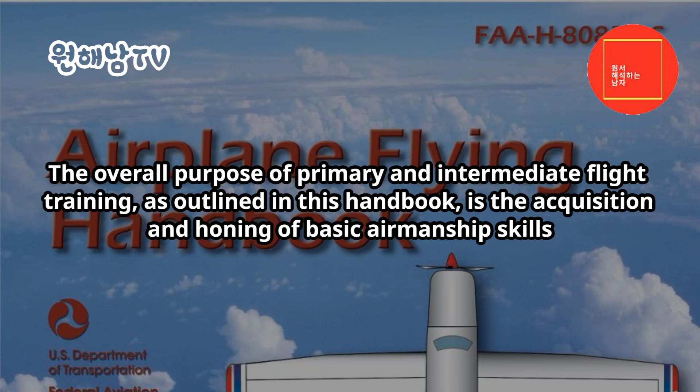Introduction. The overall purpose of primary and intermediate flight training, as outlined in this handbook, is the acquisition and honing of basic airmanship skills. Airmanship is a broad term that includes a sound knowledge of and experience with the principles of flight, the knowledge, experience, and ability to operate an aircraft with competence and precision, both on the ground and in the air, and the application of sound judgment that results in optimal operational safety and efficiency.

Learning to fly an aircraft has often been compared to learning to drive an automobile. This analogy is misleading, since aircraft operate in a three-dimensional environment and require a depth of knowledge and type of motor skill development that is more sensitive to this situation, such as coordination: the ability to use the hands and feet together subconsciously, and in the proper relationship, to produce desired results in the airplane.

Timing: the application of muscular coordination at the proper instant to make flight and all maneuvers a constant, smooth process. Control touch: the ability to sense the action of the airplane and knowledge to determine its probable actions immediately regarding attitude and speed variations, by sensing the varying pressures and resistance of the control surfaces transmitted through the flight controls.

Speed sense: the ability to sense and react to reasonable variations of airspeed. An accomplished pilot demonstrates the knowledge and ability to assess a situation quickly and accurately, and determine the correct procedure to be followed under the existing circumstance.

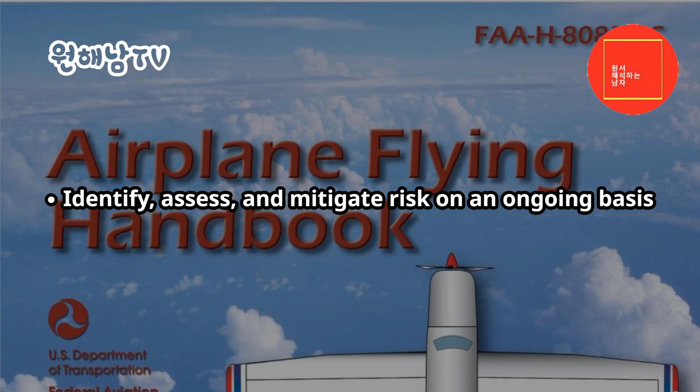The development of airmanship skills depends upon effort and dedication on the part of both the learner and the flight instructor, beginning with the very first training flight, where proper habit formation begins with the learner being introduced to good operating practices. Every airplane has its own particular flight characteristics.

The purpose of primary and intermediate flight training, however, is not to learn how to fly a particular make and model airplane. The purpose of flight training is to develop the knowledge, experience, skills, and safe habits that establish a foundation and are transferable to any airplane.

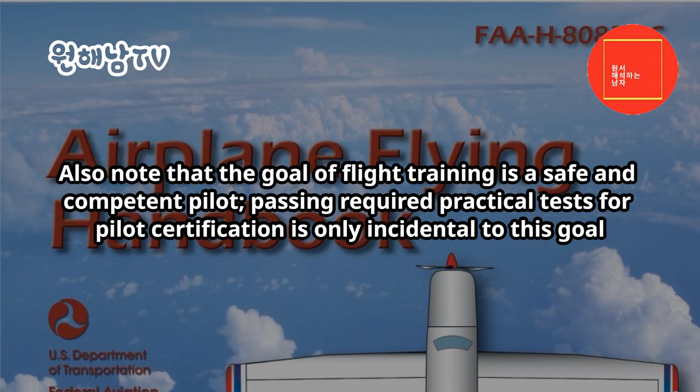The pilot who has acquired necessary skills during training, and develops these skills by flying training-type airplanes with precision and safe flying habits, is able to easily transition to more complex and higher performance airplanes. Also note that the goal of flight training is a safe and competent pilot. Passing required practical tests for pilot certification is only incidental to this goal.

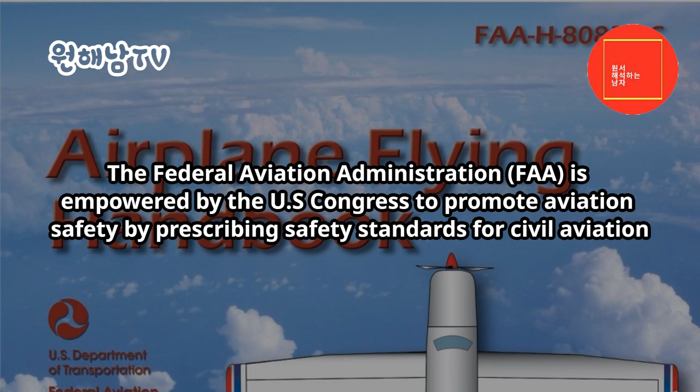Role of the FAA. The Federal Aviation Administration is empowered by the U.S. Congress to promote aviation safety by prescribing safety standards for civil aviation. Standards are established for the certification of airmen and aircraft, as well as outlining operating rules.

This is accomplished through the Code of Federal Regulations, CFR, formerly referred to as Federal Aviation Regulations, FAR. Title 14 of the CFR, 14 CFR, is titled Aeronautics and Space, with Chapter 1 dedicated to the FAA. Subchapters are broken down by category with numbered parts detailing specific information. For ease of reference, and since the parts are numerical, the abbreviated pattern 14 CFR Part blank is used, for example, 14 CFR Part 91.

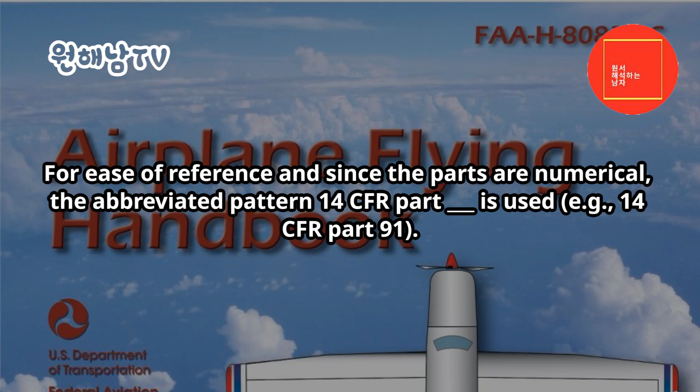This guidance is not legally binding in its own right, and will not be relied upon by the FAA as a separate basis for affirmative enforcement action or other administrative penalty. Conformity with the guidance is voluntary only, and nonconformity will not affect rights and obligations under existing statutes and regulations.

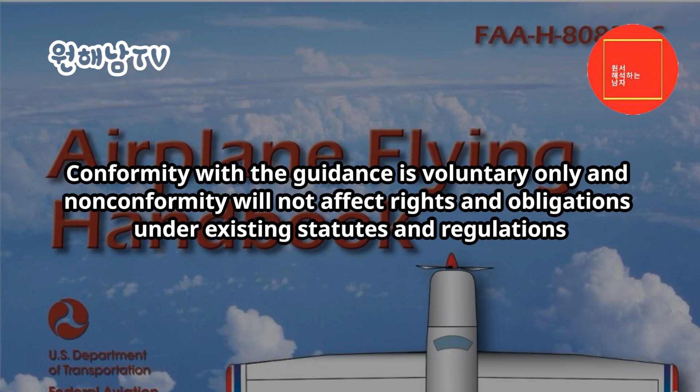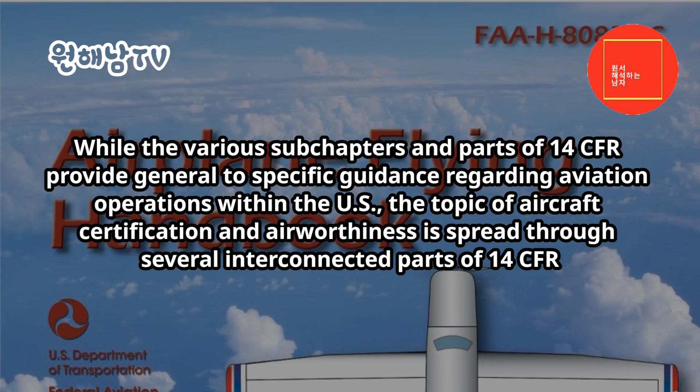While the various subchapters and parts of 14 CFR provide general to specific guidance regarding aviation operations within the U.S., the topic of aircraft certification and airworthiness is spread through several interconnected parts of 14 CFR. 14 CFR Part 21 prescribes procedural requirements for issuing airworthiness certificates and airworthiness approvals for aircraft and aircraft parts.

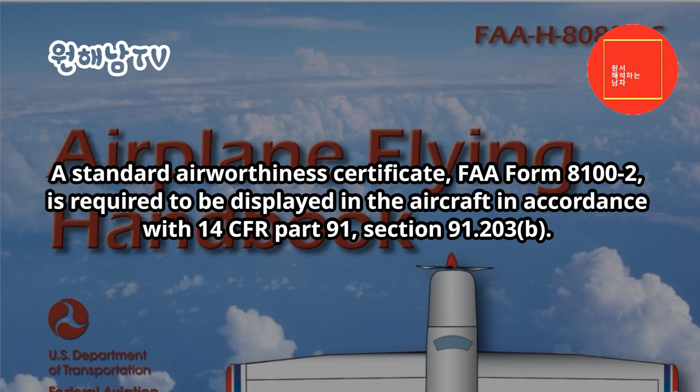A standard airworthiness certificate, FAA Form 8100-2, is required to be displayed in the aircraft in accordance with 14 CFR Part 91, Section 91.203(b). It is issued for aircraft type certificated in the normal, utility, acrobatic, commuter, or transport category, and for manned free balloons. A standard airworthiness certificate remains valid as long as the aircraft meets its approved type.

Design is in a condition for safe operation, and maintenance, preventative maintenance and alterations are performed in accordance with 14 CFR Parts 21, 43, and 91. 14 CFR Part 39 is the authority for the FAA to issue airworthiness directives, ADs, when an unsafe condition exists in a product, aircraft, or part, and the condition is likely to exist or develop in other products of the same type design.

14 CFR Part 43 prescribes rules governing the maintenance, preventive maintenance, rebuilding, and alteration of any aircraft having a U.S. airworthiness certificate. It also applies to the airframe, aircraft engines, propellers, appliances, and component parts of such aircraft.

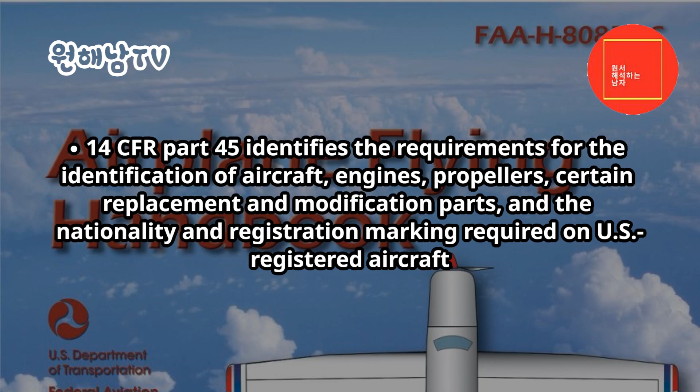14 CFR Part 45 identifies the requirements for the identification of aircraft, engines, propellers, certain replacement and modification parts, and the nationality and registration marking required on U.S. registered aircraft. 14 CFR Part 91 outlines aircraft certifications and equipment requirements for the operation of aircraft in U.S. airspace.

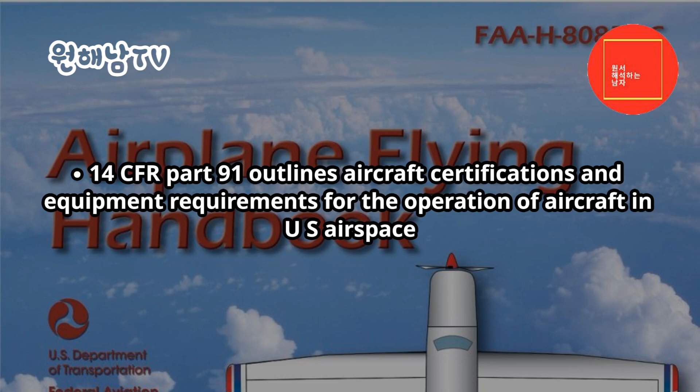It also prescribes rules governing maintenance, preventive maintenance, and alterations. Also found in 14 CFR Part 91 is the requirement to maintain records of maintenance, preventive maintenance, and alterations, as well as records of the 100-hour, annual, progressive, and other required or approved inspections.

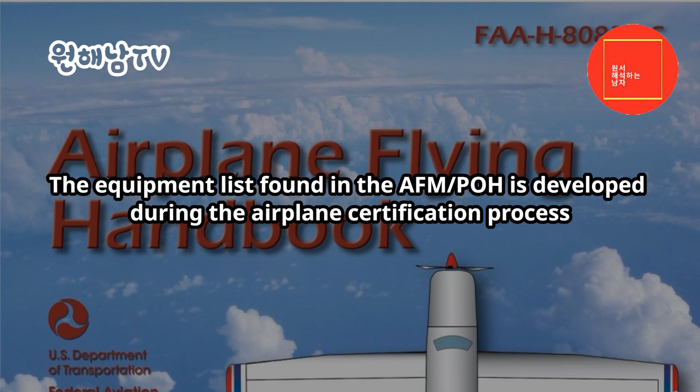While 14 CFR Part 91, Section 91.205 outlines the minimum equipment required for flight, the Airplane Flight Manual Pilot's Operating Handbook, AFMPOH, lists the equipment required for the airplane to be airworthy. The equipment list found in the AFMPOH is developed during the airplane certification process.

The equipment list, originally issued by the manufacturer, is maintained by the Type Certificate Data Sheet (TCDS). An aircraft and its installed components and parts must conform to the original type certificate or approved altered conditions to meet the definition of airworthy in accordance with 14 CFR Part 3.5.

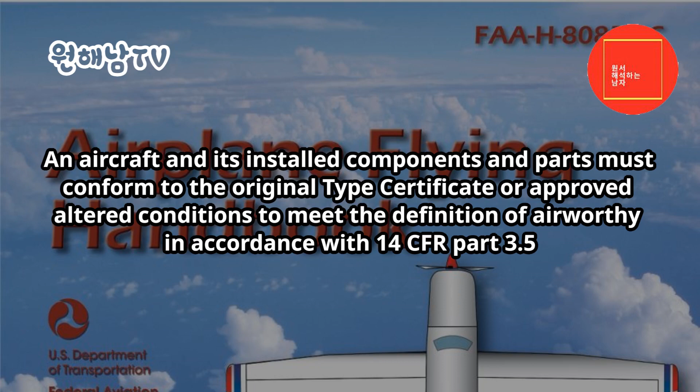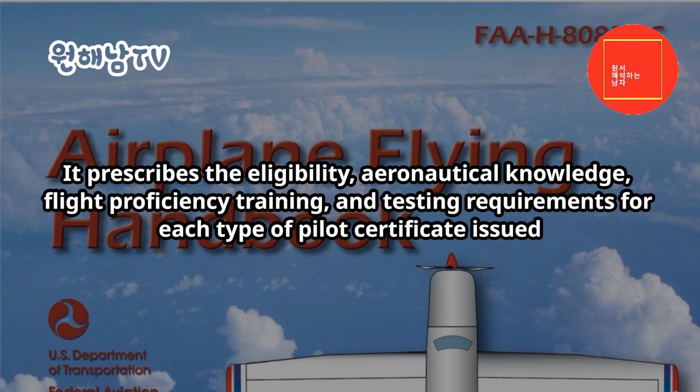Certification requirements for pilots, medical certificate requirements, and operating rules are found in the following parts. 14 CFR Part 61 pertains to the certification of pilots, flight instructors, and ground instructors. It prescribes the eligibility, aeronautical knowledge, flight proficiency training, and testing requirements for each type of pilot certificate issued.

14 CFR Part 67 prescribes the medical standards and certification procedures for issuing medical certificates for airmen, and for remaining eligible for a medical certificate. 14 CFR Part 68 contains requirements for operating certain small aircraft without a medical certificate.

14 CFR Part 91 contains general operating and flight rules. The section is broad in scope and provides general guidance in the areas of general flight rules, visual flight rules (VFR), instrument flight rules (IFR), and as previously discussed, aircraft maintenance, preventive maintenance, and alterations.

Flight Standards Service. The FAA's Flight Standards Service, FS, sets aviation standards for airmen and aircraft operations in the United States, and for American airmen and aircraft around the world.

Flight Standards is organized into 4 functional offices: Office of Safety Standards, Air Carrier Safety Assurance, General Aviation Safety Assurance, and Foundational Business. The primary interface between FS and the general aviation community is the Local Flight Standards District Office, FSDO. The FSDOs are responsible for the certification and surveillance of certain air carriers, air operators, flight schools, training centers, airmen, pilots, flight instructors, mechanics, and other certificate holders.

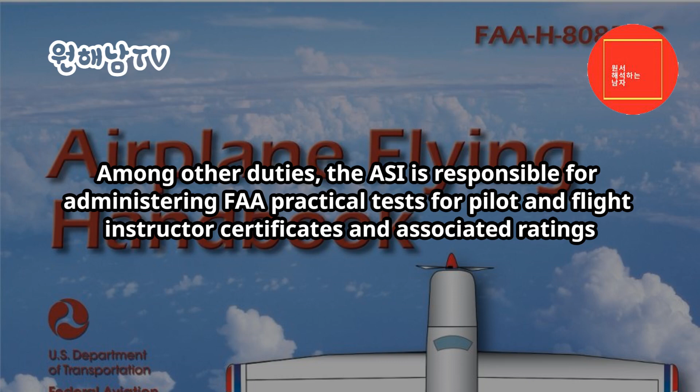Thereafter, the inspector will complete recurrent training on a regular basis. Among other duties, the ASI is responsible for administering FAA practical tests for pilot and flight instructor certificates and associated ratings. Questions concerning pilot certification and/or requests for other aviation information or services should be directed to the FSDO.

For specific FSDO locations and telephone numbers, refer to www.faa.gov. Role of the pilot examiner.

Pilot and flight instructor certificates are issued by the FAA upon satisfactory completion of required knowledge and practical tests. The administration of practical tests is an FAA responsibility that may occur at the FSDO level.

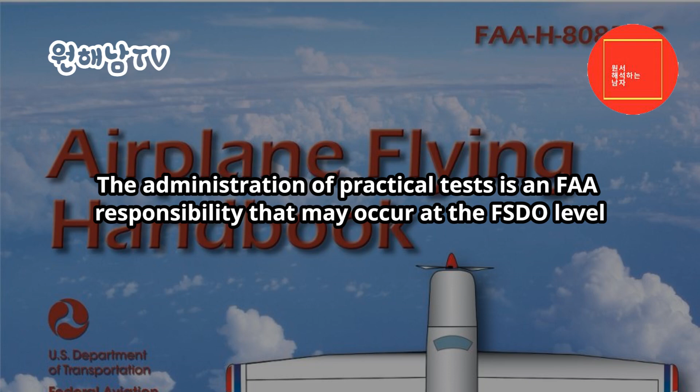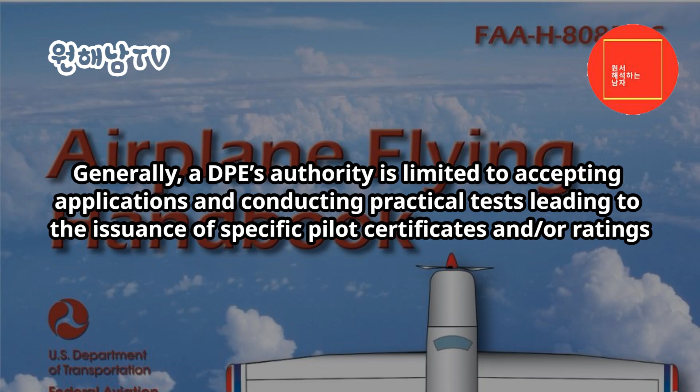However, in order to satisfy the public need for pilot testing and certification services, the FAA delegates certain responsibilities, as the need arises, to private individuals who are not FAA employees. A designated pilot examiner, DPE, is a private citizen who is designated as a representative of the FAA administrator to perform specific, but limited, pilot certification tasks on behalf of the FAA, and may charge a reasonable fee for doing so. Generally, a DPE's authority is limited to accepting applications and conducting practical tests, leading to the issuance of specific pilot certificates and/or ratings. A DPE operates under the direct supervision of the FSDO that holds the examiner's designation file.

A FSDO inspector is assigned to monitor the DPE's certification activities. The FAA selects highly qualified individuals to be DPEs. These individuals have good industry reputations for professionalism, high integrity, a demonstrated willingness to serve the public, and adherence to FAA policies and procedures in certification matters. A DPE is expected to administer practical tests with the same degree of professionalism, using the same methods, procedures, and standards as an FAA ASI.

Note that a DPE is not an FAA ASI. A DPE cannot initiate enforcement action, investigate accidents, or perform surveillance activities on behalf of the FAA. However, the majority of FAA practical tests at the recreational, private, and commercial pilot level are administered by DPEs.

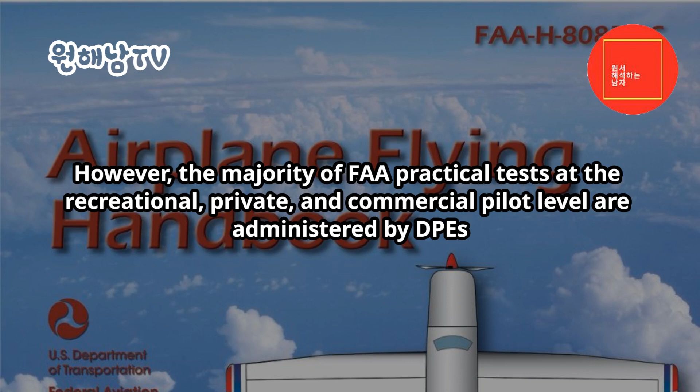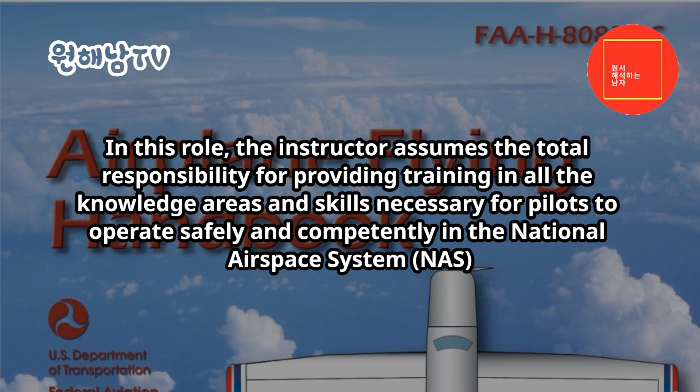Role of the flight instructor. The flight instructor is the cornerstone of aviation safety. The FAA has adopted an operational training concept that places the full responsibility for pilot training on the flight instructor. In this role, the instructor assumes the total responsibility for providing training in all the knowledge areas and skills necessary for pilots to operate safely and competently in the National Airspace System, NAS. This training includes airmanship skills, pilot judgment and decision-making, hazard identification, risk analysis, and good operating practices.

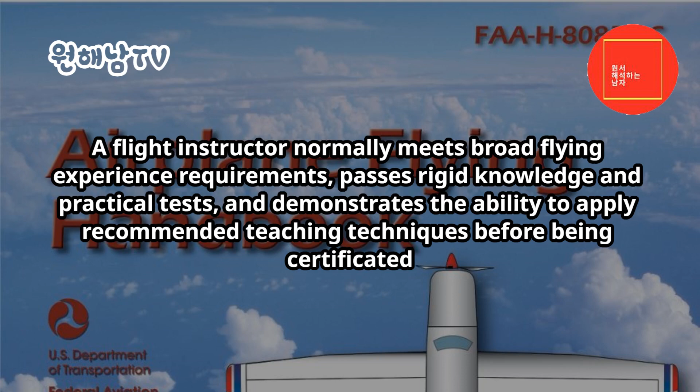A flight instructor normally meets broad flying experience requirements, passes rigid knowledge and practical tests, and demonstrates the ability to apply recommended teaching techniques before being certificated. A pilot training program is dependent on the quality of the ground and flight instruction given. A good flight instructor has a thorough understanding of the learning process, knowledge of the fundamentals of instruction, and the ability to communicate effectively with the learner.

A good flight instructor uses a syllabus and insists on correct techniques and procedures from the beginning of training, so that the learner will develop proper habit patterns. The syllabus should embody the building block method of instruction, in which the learner systematically progresses from the known to the unknown. The course of instruction should be laid out so that each new maneuver embodies the principles involved in the performance of those previously undertaken.

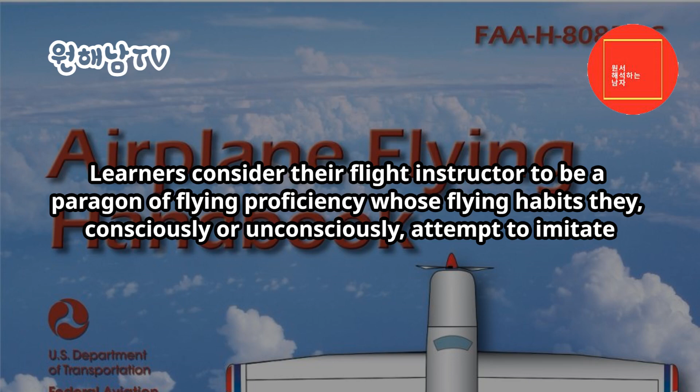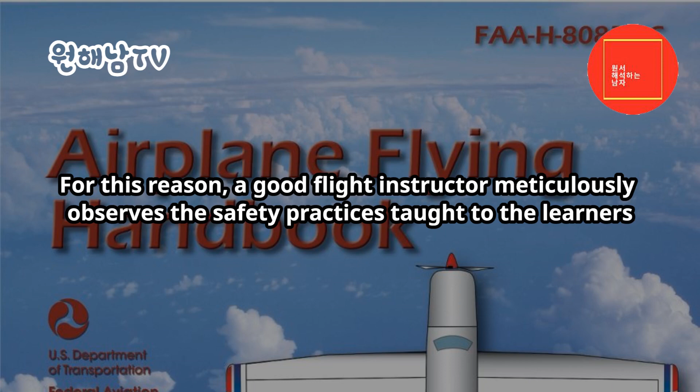Consequently, through each new subject introduced, the learner not only learns a new principle or technique, but also broadens their application of those previously learned, and has their deficiencies in the previous maneuvers emphasized and made obvious. The flying habits of the flight instructor, both during flight instruction and as observed by learners when conducting other pilot operations, have a vital effect on safety. Learners consider their flight instructor to be a paragon of flying proficiency, whose flying habits they, consciously or unconsciously, attempt to imitate. For this reason, a good flight instructor meticulously observes the safety practices taught to the learners, and carefully observes all regulations and recognized safety practices during all flight operations.

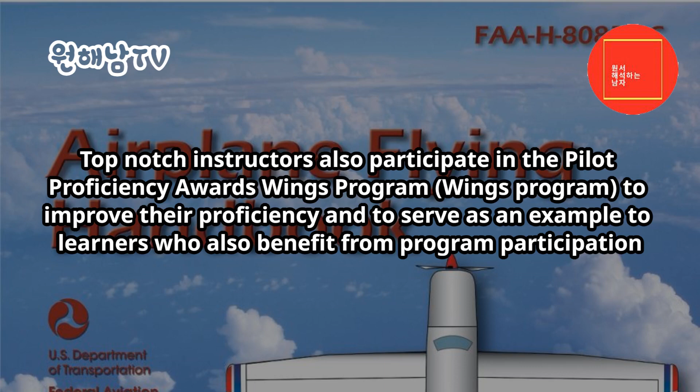A prospective pilot should know that there are other differences among flight instructors. Certain instructors who have performed at a high level have earned a Gold Seal Flight Instructor Certificate. This is not a requirement when looking for an instructor, but it is an indication of an active and successful instructor. Top-notch instructors also participate in the Pilot Proficiency Awards Wings program, to improve their proficiency, and to serve as an example to learners who also benefit from program participation.

Generally, an individual who enrolls in a pilot training program is prepared to commit considerable time, effort, and expense in pursuit of a pilot certificate. A trainee may judge the effectiveness of the flight instructor and the overall success of the pilot training program solely in terms of being able to pass the requisite FAA practical test.

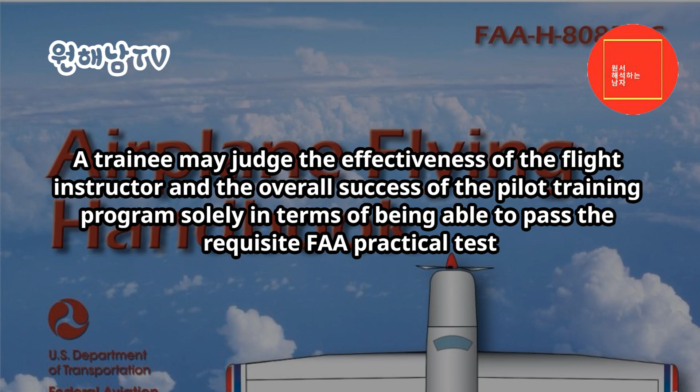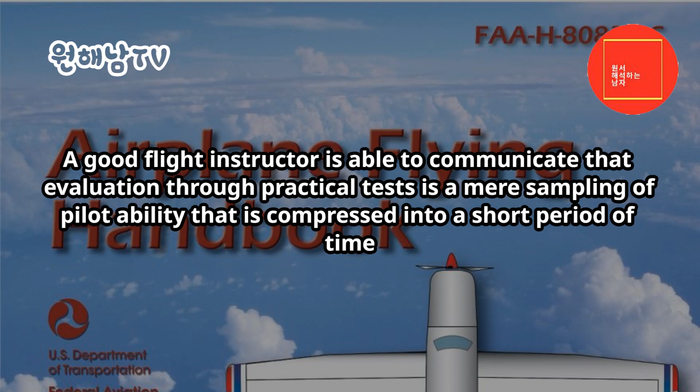A good flight instructor is able to communicate that evaluation through practical tests is a mere sampling of pilot ability that is compressed into a short period of time. The flight instructor's role is to train the total pilot.

Sources of flight training. The major sources of flight training in the United States include FAA-approved pilot schools and training centers, non-certificated 14 CFR Part 61 flying schools, and independent flight instructors.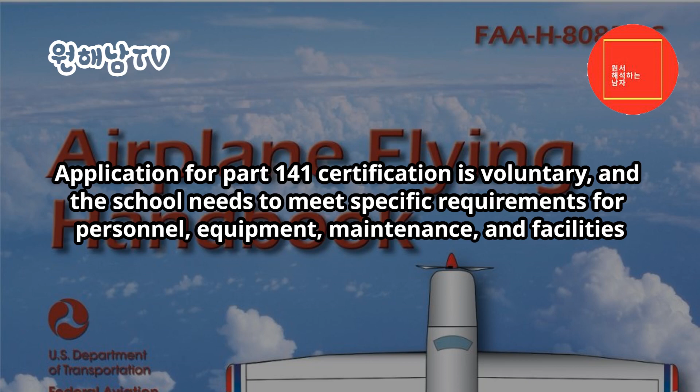FAA-approved schools are those flight schools certificated by the FAA as pilot schools under 14 CFR Part 141. Application for Part 141 certification is voluntary, and the school needs to meet specific requirements for personnel, equipment, maintenance, and facilities. The school operates each course offering in accordance with an established curriculum that includes a training course outline, TCO, approved by the FAA. Each TCO contains enrollment prerequisites, a detailed description of each lesson including standards and objectives, expected accomplishments and standards for each stage of training.

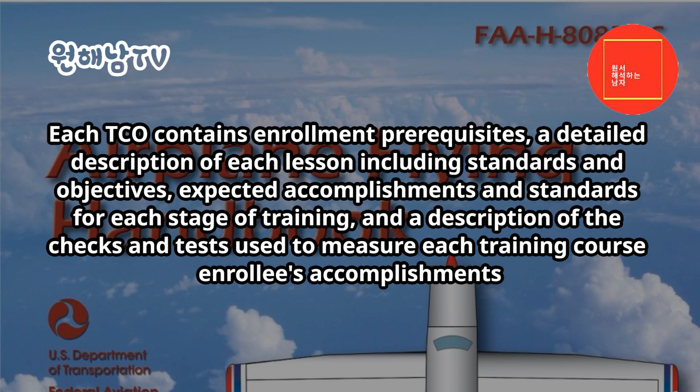A description of the checks and tests used to measure each training course enrollee's accomplishments. An FAA-approved pilot school air agency certificate expires and needs to be renewed every 2 years. Renewal is contingent upon proof of continued high-quality instruction and a minimum level of instructional activity. Training at an FAA-certificated pilot school is structured, and because of this structured environment, the graduates of these pilot schools are allowed to meet the certification experience requirements of 14 CFR Part 61 with less flight time.

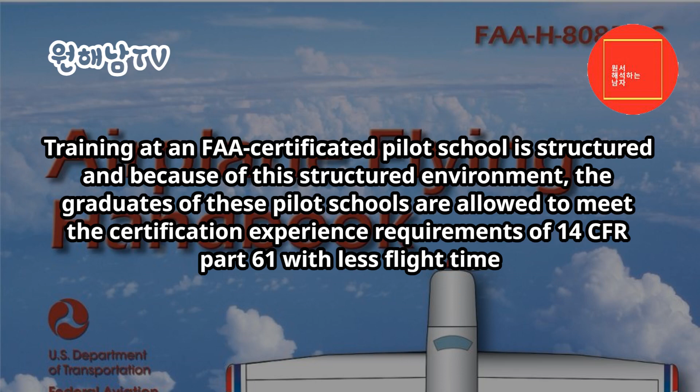Many FAA-certificated pilot schools have DPEs on staff to administer FAA practical tests. Some schools have been granted examining authority by the FAA. A school with examining authority for a particular course has the authority to recommend its graduates for pilot certificates or ratings without further testing by the FAA. A list of FAA-certificated pilot schools and their training courses can be found at av-info.faa.gov/PilotSchool.asp.

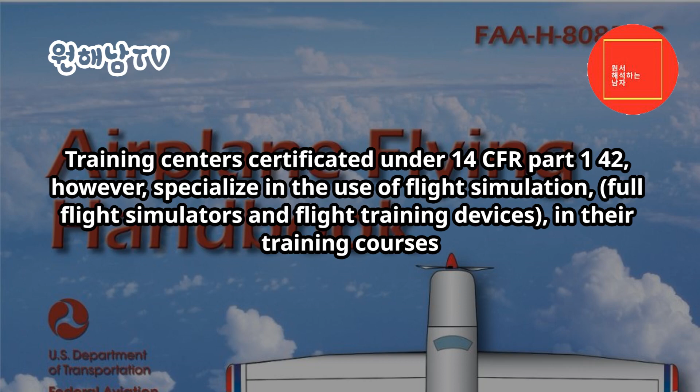FAA-approved training centers are certificated under 14 CFR Part 142. Training centers, like certificated pilot schools, operate in a structured environment with approved courses and curricula and stringent standards for personnel, equipment, facilities, operating procedures, and record-keeping. Training centers certificated under 14 CFR Part 142, however, specialize in the use of flight simulation, full flight simulators and flight training devices, in their training courses.

There are a number of flying schools in the United States that are not certificated by the FAA. These schools operate under the provisions of 14 CFR Part 61. Many of these non-certificated flying schools offer excellent training and meet or exceed the standards required of FAA-approved pilot schools. Flight instructors employed by non-certificated flying schools, as well as independent flight instructors, meet the same basic 14 CFR Part 61 flight instructor requirements for certification and renewal as those flight instructors employed by FAA-certificated pilot schools.

In the end, any training program is dependent upon the quality of the ground and flight instruction a learner receives.

Airman Certification Standards, ACS, and Practical Test Standards, PTS. Practical tests for FAA pilot certificates and associated ratings are administered by FAA inspectors and DPEs using FAA Airman Certification Standards, ACS, and Practical Test Standards, PTS, which contain structured areas of operation, tasks, and standards. 14 CFR Part 61, Section 61.43 specifies that the practical test consists of the tasks specified in the areas of operation for the airman certificate or rating sought.

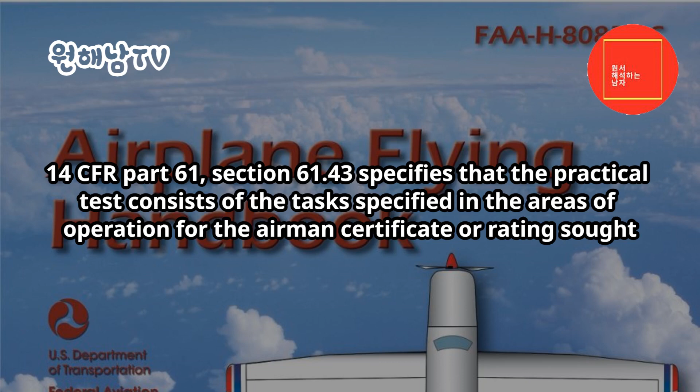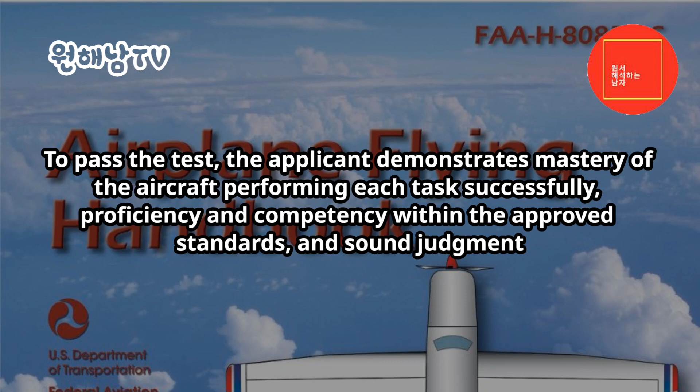To pass the test, the applicant demonstrates mastery of the aircraft, performing each task successfully, proficiency and competency within the approved standards, and sound judgment.

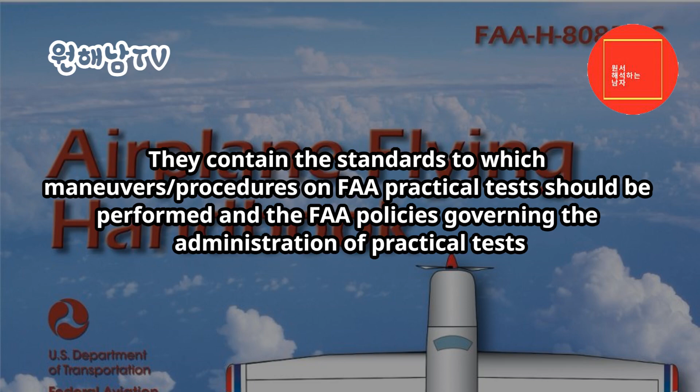It should be emphasized that the ACS and PTS are testing documents rather than teaching documents, although the pilot applicant should be familiar with these books and refer to the standards they contain during training. The ACS and PTS are not intended to be used as a training syllabus. They contain the standards to which maneuvers and procedures on FAA practical tests should be performed, and the FAA policies governing the administration of practical tests.

An appropriately rated flight instructor is responsible for training a pilot applicant to acceptable standards in all subject matter areas, procedures, and maneuvers included in, and encompassed by, the tasks within each area of operation in the appropriate ACS and PTS. Flight instructors and pilot applicants should always remember that safe, competent piloting requires a commitment to learning, planning, and risk management that goes beyond rote performance of maneuvers.

Descriptions of tasks and information on how to perform maneuvers and procedures are contained in reference and teaching documents, such as this handbook. A list of reference documents is contained in the appendices of each ACS and PTS.

It is necessary that the latest version of the PTS and ACS, with all recent changes, be referenced for training. All recent versions and changes to the FAA ACS and PTS may be viewed or downloaded at

www.faa.gov. Safety considerations: in the interest of safety and good habit pattern formation, there are certain basic flight safety practices and procedures that should be emphasized by the flight instructor and adhered to by both instructor and learner, beginning with the very first dual instruction flight.

These include, but are not limited to, collision avoidance procedures, including proper scanning techniques and clearing procedures, runway incursion avoidance, stall awareness, positive transfer of controls, and flight deck workload management.

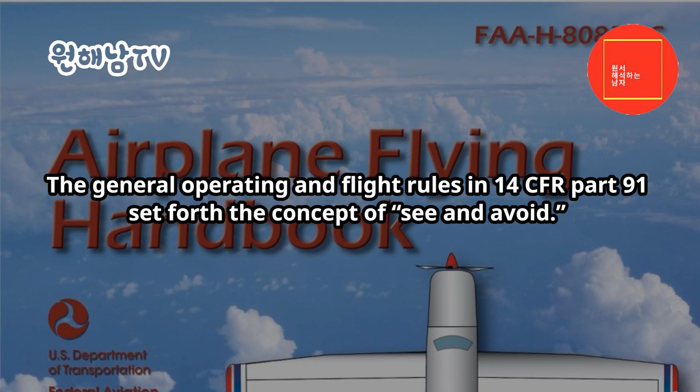Collision avoidance: all pilots should be alert to the potential for mid-air collision and impending loss of separation. The general operating and flight rules in 14 CFR Part 91 set forth the concept of see and avoid. This concept requires that vigilance shall be maintained at all times by each person operating an aircraft, regardless of whether the operation is conducted under IFR or VFR.

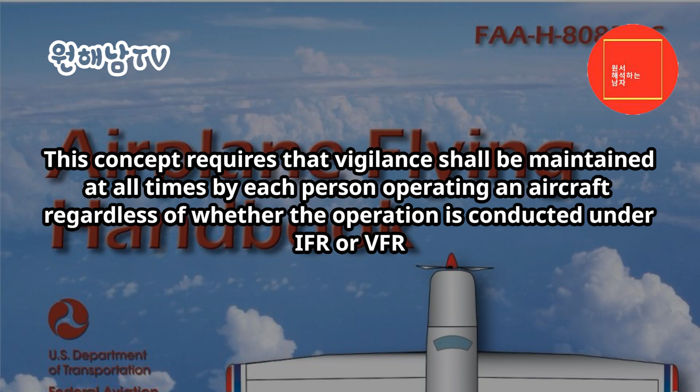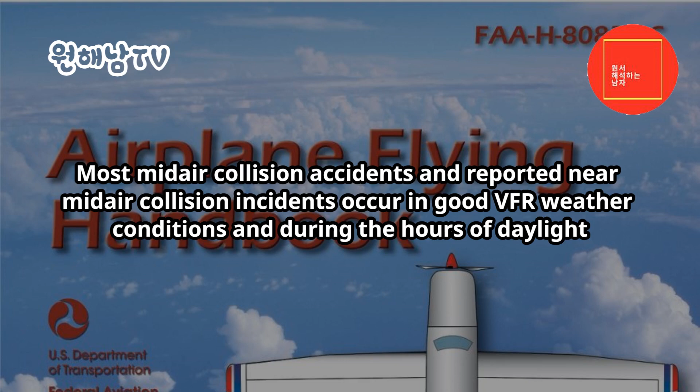Pilots should also keep in mind their responsibility for continuously maintaining a vigilant lookout, regardless of the type of aircraft being flown and the purpose of the flight. Most mid-air collision accidents and reported near mid-air collision incidents occur in good VFR weather conditions and during the hours of daylight. Most of these accidents and incidents occur within 5 miles of an airport and/or near navigation aids.

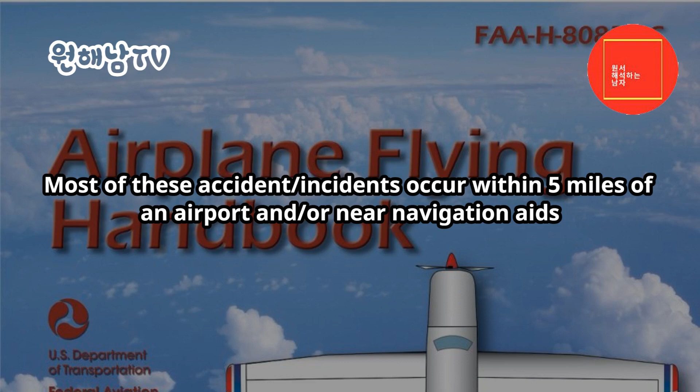The see and avoid concept relies on knowledge of the limitations of the human eye, and the use of proper visual scanning techniques to help compensate for these limitations. Pilots should remain constantly alert to all traffic movement within their field of vision, as well as periodically scanning the entire visual field outside of their aircraft, to ensure detection of conflicting traffic.

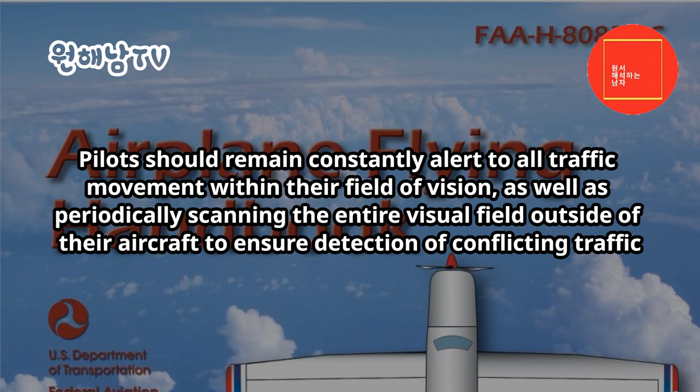Remember that the performance capabilities of many aircraft, in both speed and rates of climb and descent, result in high closure rates, limiting the time available for detection, decision, and evasive action. The probability of spotting a potential collision threat increases with the time spent looking outside, but certain techniques may be used to increase the effectiveness of the scan time.

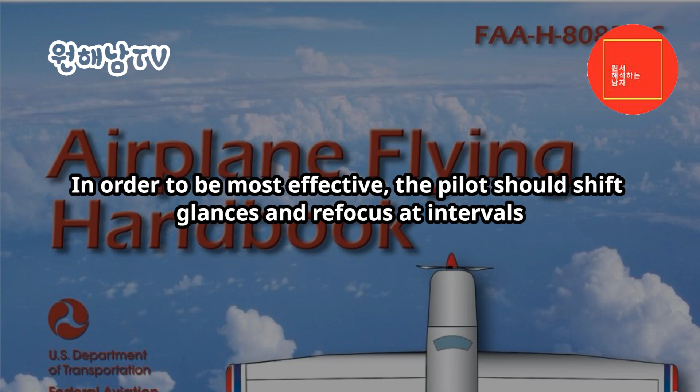The human eyes tend to focus somewhere, even in a featureless sky. In order to be most effective, the pilot should shift glances and refocus at intervals. Most pilots do this in the process of scanning the instrument panel, but it is also important to focus outside to set up the visual system for effective target acquisition.

Pilots should also realize that their eyes may require several seconds to refocus when switching views between items on the instrument panel and distant objects. Proper scanning requires the constant sharing of attention with other piloting tasks, thus it is easily degraded by psychological and physiological conditions such as fatigue, boredom, illness, anxiety, or preoccupation.

Effective scanning is accomplished with a series of short, regularly spaced eye movements that bring successive areas of the sky into the central visual field. Each movement should not exceed 10 degrees, and each area should be observed for at least 1 second to enable detection. Although horizontal back and forth eye movements seem preferred by most pilots, each pilot should develop a scanning pattern that is comfortable and adhere to it to assure optimum scanning.

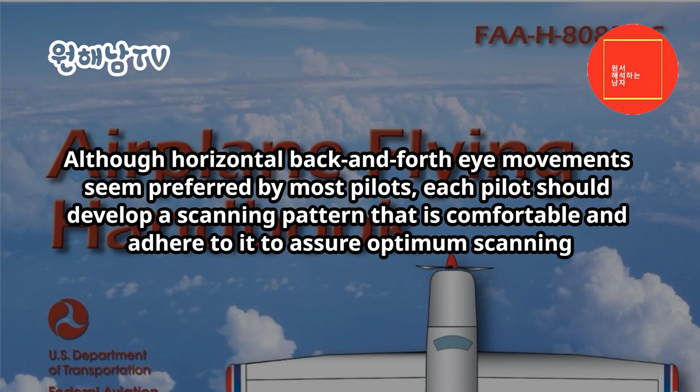Peripheral vision can be most useful in spotting collision threats from other aircraft. Each time a scan is stopped and the eyes are refocused, the peripheral vision takes on more importance because it is through this element that movement is detected. Apparent movement is usually the first perception of a collision threat, and probably the most important because it is the discovery of a threat that triggers the events leading to proper evasive action.

It is essential to remember that if another aircraft appears to have no relative motion, it is likely to be on a collision course. If the other aircraft shows no lateral or vertical motion, but is increasing in size, the observing pilot needs to take immediate evasive action to avoid a collision.

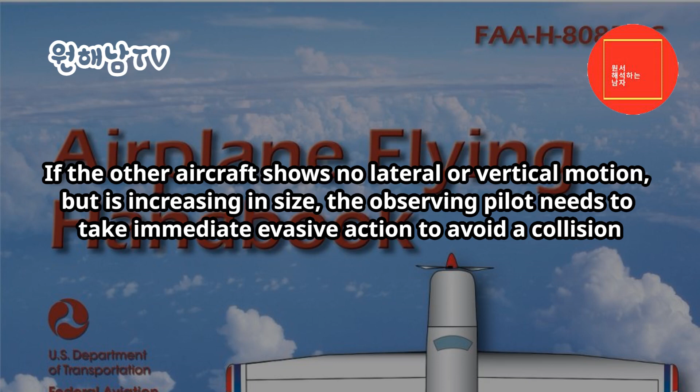The importance of, and the proper techniques for, visual scanning should be taught at the very beginning of flight training. The competent flight instructor should be familiar with the visual scanning and collision avoidance information contained in AC 90-48, Pilot's Role in Collision Avoidance, and the Aeronautical Information Manual, the AIM.

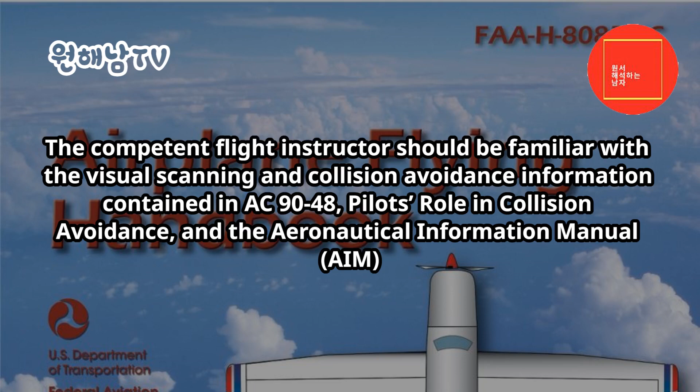There are many different types of clearing procedures. Most are centered around the use of clearing turns.

The essential idea of the clearing turn is to be certain that the next maneuver is not going to proceed into another aircraft's flight path.

Some pilot training programs have hard and fast rules, such as requiring 90 degree turns in opposite directions before executing any training maneuver. Other clearing procedures may be developed by individual flight instructors. Whatever the preferred method, the flight instructor should teach the beginning learner an effective clearing procedure and insist on its use. The learner should execute the appropriate clearing procedure before all turns and before executing any training maneuver.

Proper clearing procedures, combined with proper visual scanning techniques, are the most effective strategy for collision avoidance.

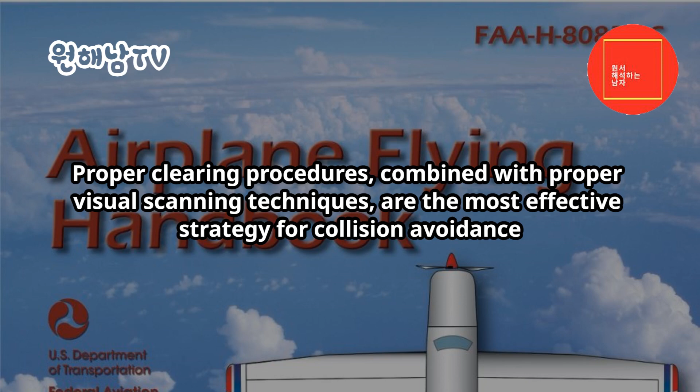In case of pilot incapacitation, an installed emergency autoland (EAL) system may take control of an airplane, navigate to an airport, and land without additional human intervention. Currently, these systems take no evasive action in response to potential impact with another aircraft. Although they transmit over the radio, pilots should avoid the path of any aircraft under the control of an EAL, or suspected as under the control of an EAL system. The Emergency Procedures chapter in this handbook contains additional information about these systems.

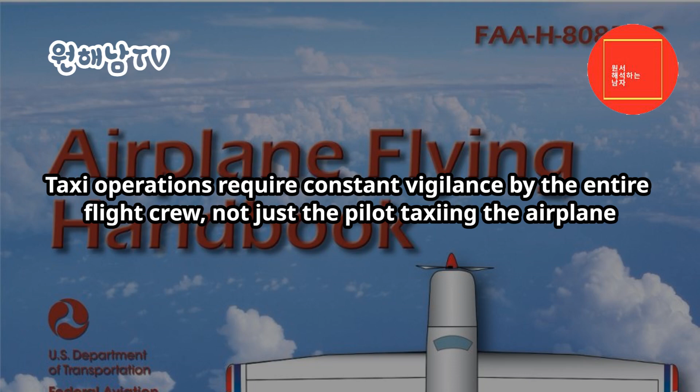Runway incursion avoidance. A runway incursion is any occurrence at an airport involving an aircraft, vehicle, person, or object on the ground that creates a collision hazard or results in a loss of separation with an aircraft taking off, landing, or intending to land. The three major areas contributing to runway incursions are communications, airport knowledge, and flight deck procedures for maintaining orientation. Taxi operations require constant vigilance by the entire flight crew, not just the pilot taxiing the airplane.

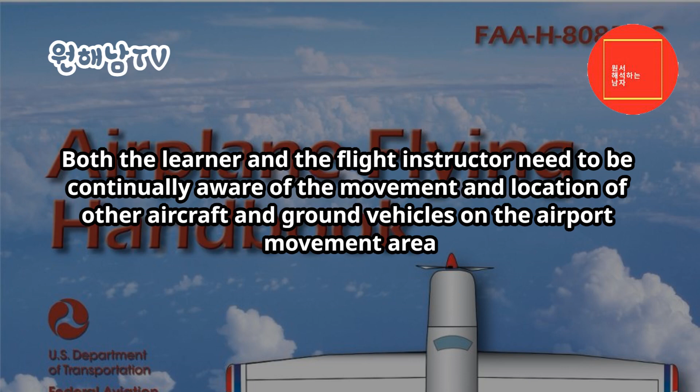During flight training, the instructor should emphasize the importance of vigilance during taxi operations. Both the learner and the flight instructor need to be continually aware of the movement and location of other aircraft and ground vehicles on the airport movement area.

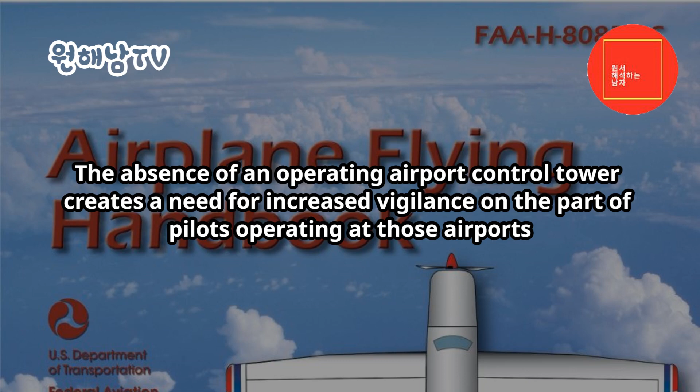Many flight training activities are conducted at non-tower controlled airports. The absence of an operating airport control tower creates a need for increased vigilance on the part of pilots operating at those airports. Planning, clear communications, and enhanced situational awareness during airport surface operations reduces the potential for surface incidents.

Safe aircraft operations can be accomplished and incidents eliminated if the pilot is properly trained early on and throughout their flying career on standard taxi operating procedures and practices. This requires the development of the formalized teaching of safe operating practices during taxi operations. The flight instructor is the key to this teaching.

The flight instructor should instill in the learner an awareness of the potential for runway incursion, and should emphasize runway incursion avoidance procedures. For more information and a list of additional references, refer to Chapter 14 of the Pilot's Handbook of Aeronautical Knowledge. Stall awareness.

14 CFR Part 61, Section 61.87, D.10, and E.10 require that a student pilot who is receiving training for a single-engine or multi-engine airplane rating or privileges, respectively, log flight training in stalls and stall recoveries prior to solo flight.

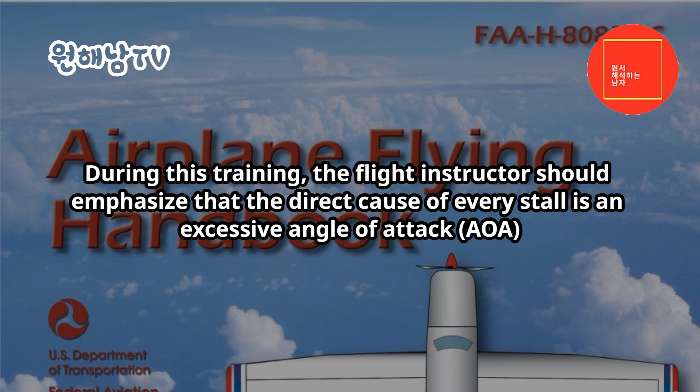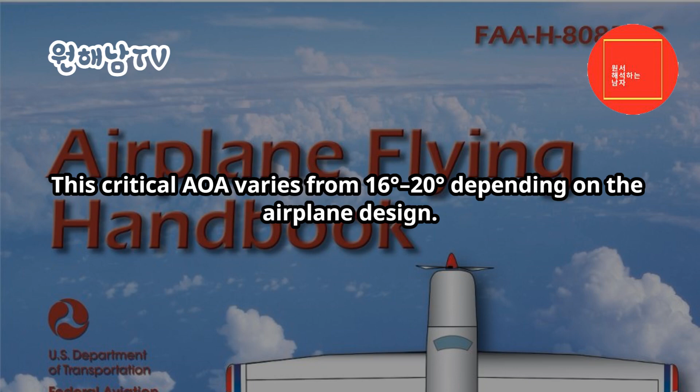During this training, the flight instructor should emphasize that the direct cause of every stall is an excessive angle of attack (AOA). The student pilot should fully understand that several flight maneuvers may produce an increase in the wing's AOA, but the stall does not occur until the AOA becomes excessive. This critical AOA varies from 16 degrees to 20 degrees depending on the airplane design.

The flight instructor should emphasize that low speed is not necessary to produce a stall. The wing can be brought to an excessive AOA at any speed. High pitch attitude is not an absolute indication of proximity to a stall. Some airplanes are capable of vertical flight with a corresponding low AOA. Most airplanes are quite capable of stalling at a level or near level pitch attitude.

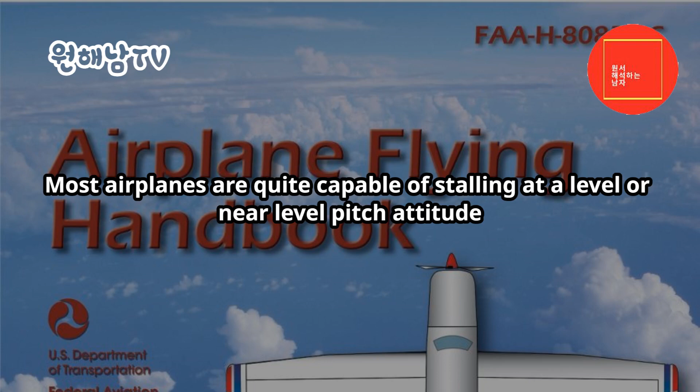The key to stall awareness is the pilot's ability to visualize the wing's AOA in any particular circumstance, and thereby be able to estimate his or her margin of safety above stall. This is a learned skill that should be acquired early in flight training and carried through the pilot's entire flying career. The pilot should understand and appreciate factors such as airspeed, pitch, attitude, load factor, relative wind, power setting, and aircraft configuration.

In order to develop a reasonably accurate mental picture of the wing's AOA at any particular time, it is essential to safety of flight that pilots take into consideration this visualization of the wing's AOA prior to entering any flight maneuver.

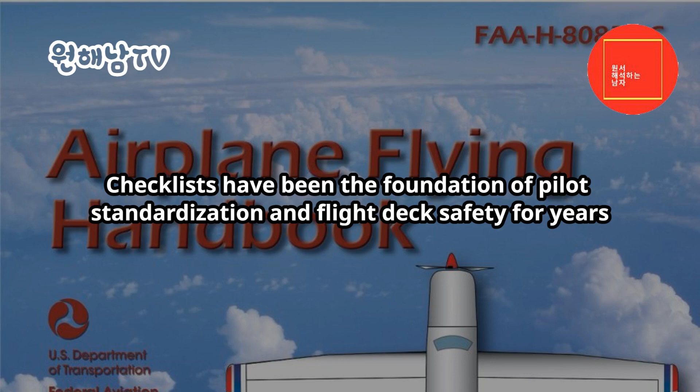Use of checklists. Checklists have been the foundation of pilot standardization and flight deck safety for years. The checklist is a memory aid and helps to ensure that critical items necessary for the safe operation of aircraft are not overlooked or forgotten.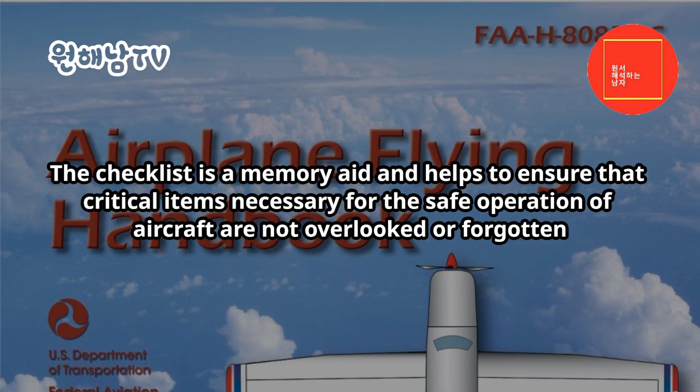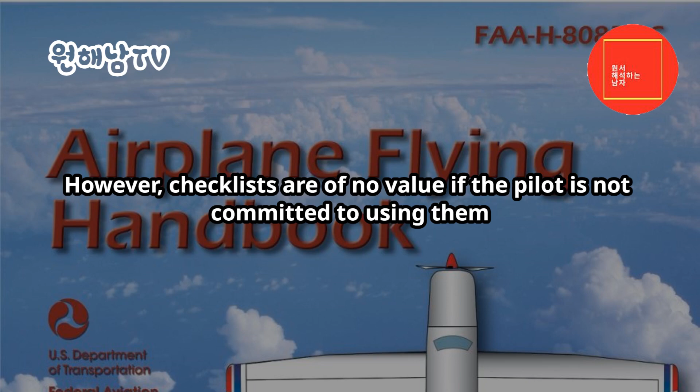Checklists need not be do lists. In other words, the proper actions can be accomplished, and then the checklist used to quickly ensure all necessary tasks or actions have been completed, with emphasis on the check in checklist. However, checklists are of no value if the pilot is not committed to using them. Without discipline and dedication to using the appropriate checklists at the appropriate times, the odds are on the side of error. Pilots who fail to take the use of checklists seriously become complacent and begin to rely solely on memory.

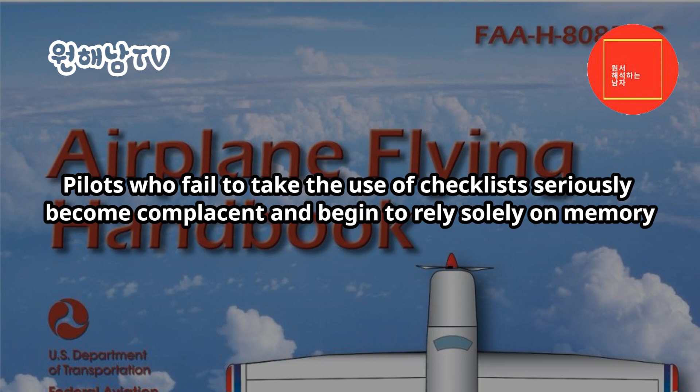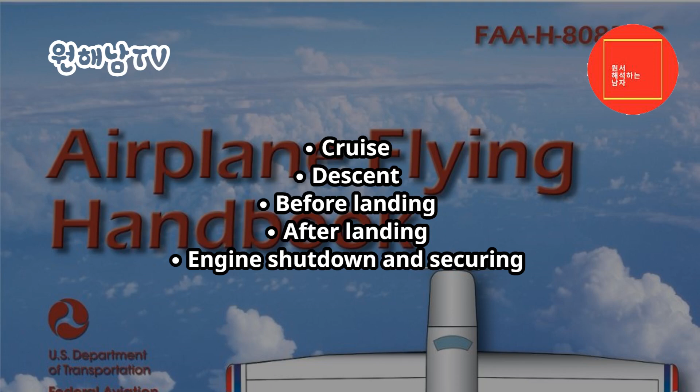The importance of consistent use of checklists cannot be overstated in pilot training. A major objective in primary flight training is to establish habit patterns that will serve pilots well throughout their entire flying career. The flight instructor should promote a positive attitude toward checklist usage, and the learner should realize its importance. At a minimum, prepared checklists should be used for the following phases of flight: pre-flight inspection, before engine start, engine starting, before taxiing, before takeoff, after takeoff, cruise, descent, before landing, after landing, engine shutdown and securing.

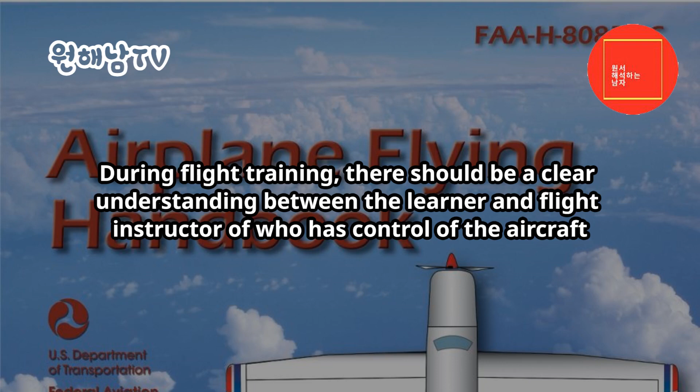During flight training, there should be a clear understanding between the learner and flight instructor of who has control of the aircraft. Prior to any flight, a briefing should be conducted that includes the procedures for the exchange of flight controls. The following three-step process for the exchange of flight controls is highly recommended.

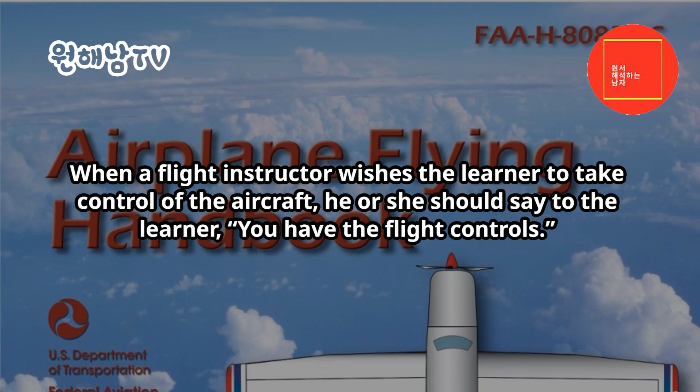When a flight instructor wishes the learner to take control of the aircraft, he or she should say to the learner, 'You have the flight controls.' The learner should acknowledge immediately by saying, 'I have the flight controls.' The flight instructor should then confirm by again saying, 'You have the flight controls.' Part of the procedure should be a visual check to ensure that the other person actually has the flight controls.

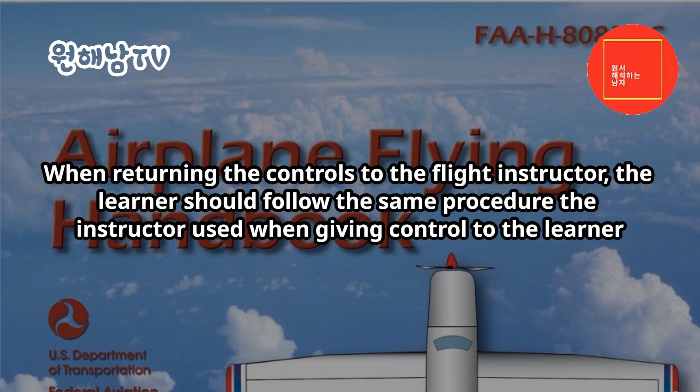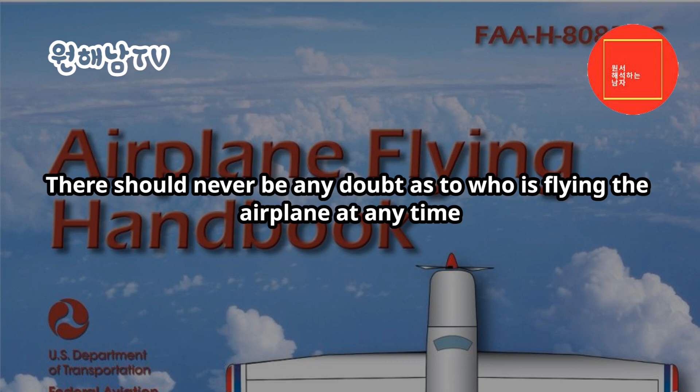When returning the controls to the flight instructor, the learner should follow the same procedure the instructor used when giving control to the learner. The learner should stay on the controls until the instructor says, 'I have the flight controls.' There should never be any doubt as to who is flying the airplane at any time. Numerous accidents have occurred due to a lack of communication or misunderstanding as to who actually had control of the aircraft, particularly between learners and flight instructors. Establishing the above procedure during initial training ensures the formation of a very beneficial habit pattern.

Continuing education. In many activities, the ability to receive feedback and continue learning contributes to safety and success. For example, professional athletes receive constant coaching. They practice various techniques to achieve their best. Medical professionals read journals, train, and master techniques to achieve better outcomes.

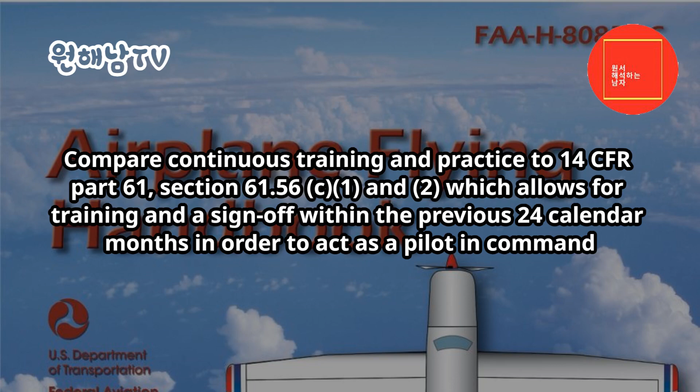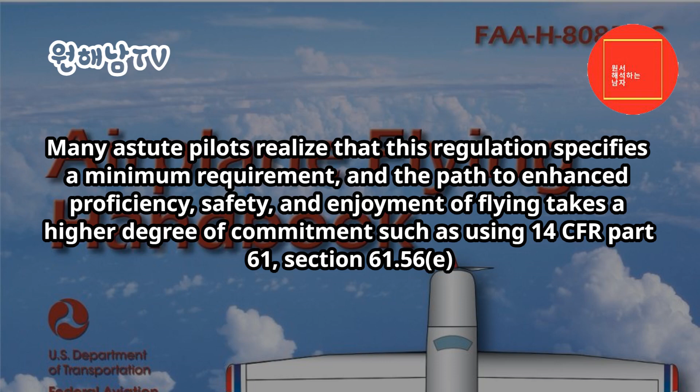FAA Wings Program. Compare continuous training and practice to 14 CFR Part 61, Section 61.56, c, 1 and 2, which allows for training and a sign-off within the previous 24 calendar months in order to act as a pilot in command. Many astute pilots realize that this regulation specifies a minimum requirement, and the path to enhanced proficiency, safety, and enjoyment of flying takes a higher degree of commitment, such as using 14 CFR Part 61, Section 61.56, e. For this reason, many pilots keep their flight review up to date using the FAA Wings program.

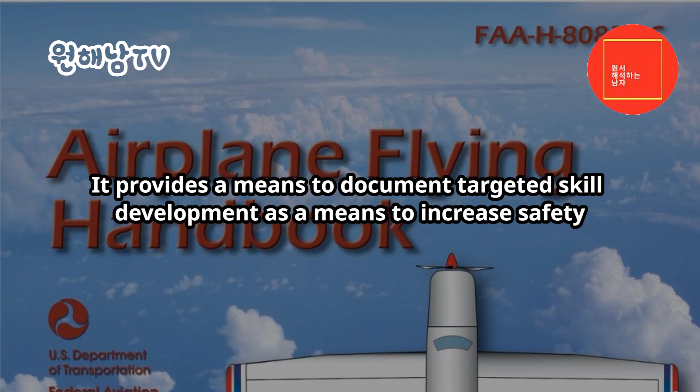The program provides continuing pilot education and contains interesting and relevant study materials that pilots can use all year round. A pilot may create a Wings account by logging on to www.faasafety.gov. This account gives the pilot access to the latest information concerning aviation technology and risk mitigation. It provides a means to document targeted skill development as a means to increase safety. As an added bonus, participants may receive a discount on certain flight insurance policies.

Chapter summary. This chapter discussed some of the concepts and goals of primary and intermediate flight training. It identified and provided an explanation of regulatory requirements and the roles of the various entities involved. It also offered recommended techniques to be practiced and refined to develop the knowledge, proficiency, and safe habits of a competent pilot.